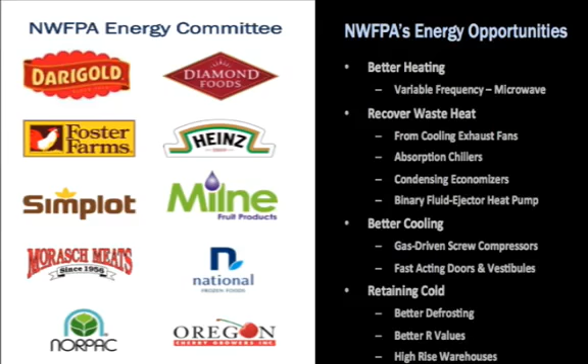So, where did today's content come from? Well, we worked with the pilot team of NWFPA members. They prioritized problems and opportunities for which externally developed innovations might be a solution for the entire membership. For each of these opportunity categories, Emerging Tech Accelerator does a worldwide scan and identifies 50 to 100 solution possibilities. These short lists are then studied and ranked by the pilot team, and then we invite the top-ranked innovators to

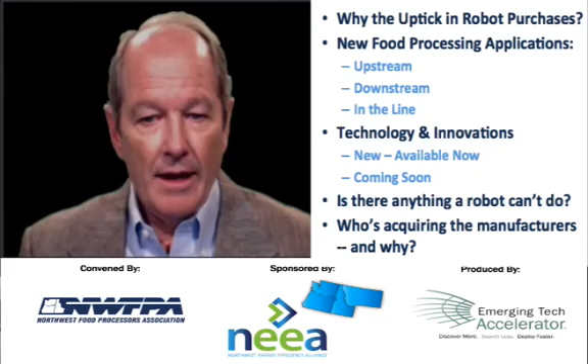present in this forum. I'm going to introduce the panel in just a moment, but first, here's a list of topics we'll be covering with the panel. If there's something you want to cover that is not on that list, don't hesitate to ask, just use the chat screen. Okay, let's introduce the panel.

Representing robot manufacturers is Jonathan Farrell of ABB Robotics. ABB is based in Basel, Switzerland, but Jonathan works out of Denver, Colorado, where he can sometimes be found doing time and motion studies on a big bike. Representing system integrators is Ken Tennell of Bastion Robotics. Bastion is in Maryland, Missouri, a suburb of St. Louis. Representing the CapEx decision, whether to buy a robot or not, is Charles Goulding of R&D Tax Savers from Syosset, New York, a few miles south of Oyster Bay on Long Island.

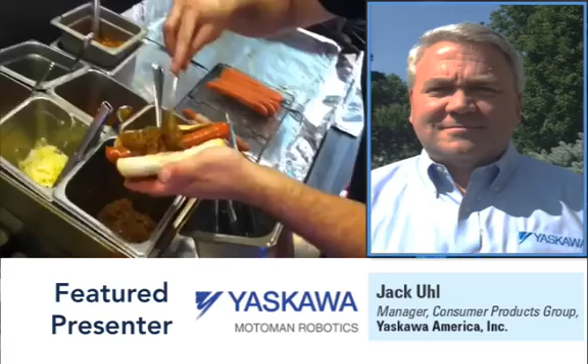And also, let me introduce our featured manufacturer, Jack Uhl of Yaskawa Motoman. Yaskawa is from Kitakyushu, Japan, but Jack is from Cincinnati, Ohio, home of the Skyliner.

All right, well, thank you very much for the time today. And actually, the panel did an excellent job highlighting and underscoring a lot of the new technology developments within the food processing and food packaging environment. I'm Jack Uhl. I'm the sales manager for Yaskawa Motoman Robotics, specifically our consumer products group. We are headquartered in Miamisburg, Ohio, just south of Dayton. And I'm very eager to share some of the technologies that we see at Yaskawa Motoman that are influencers and technology advancements within food packaging and processing.

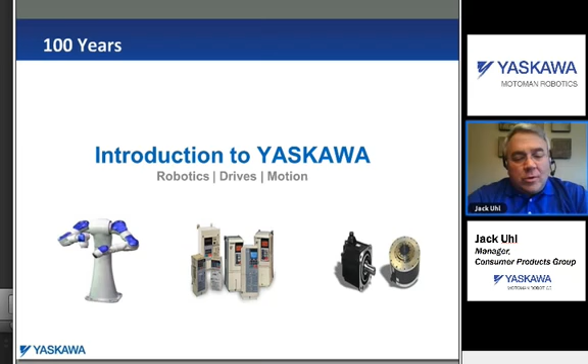First, a little bit about who we are at Yaskawa. We are a 100-year-old company. Most people know us for anything that moves. We are considered motion experts. We have 3 different groups within Yaskawa: Motoman Robotics, and then our drives and motion, which are drives, and everything motion related with servo controls.

Headquartered in Kitakyushu, Japan, we've got about 15,000 employees, but we are a very centric U.S. operation. Our headquarters is in Waukegan, Illinois, outside Chicago, which is the building on the lower left. And our Motoman headquarters, again, is in Miamisburg, where we house about 500 employees. And we control everything robotic from Canada through South America.

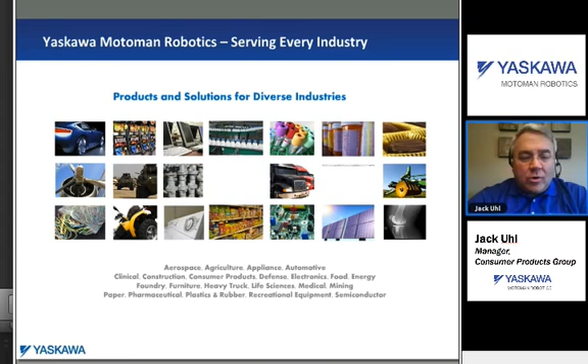Globally, we have facilities in 25 countries on 6 of the 7 continents. It provides support from engineering, applications, product development, assembly, and integration. So virtually, since most of our food and beverage organizations that we support are global entities, we provide that global support as well. But we expand certainly beyond the food and beverage industry. We have a presence in virtually all the industries from aerospace to medical, pharmaceutical, certainly heavy industry, agricultural, as well as consumer goods.

So let's start by understanding a little bit about robotics and food and packaging. This particular data illustrates a rather alarming trend within consumer packaging, and that is the growth of robotics. If we look at this and understand that we segment this into two different areas, the blue is representative of end-of-the-line automation, which is palletizing, and then the red signifies upstream automation in robotics, which is pick and pack. So it's your processing and your initial packaging.

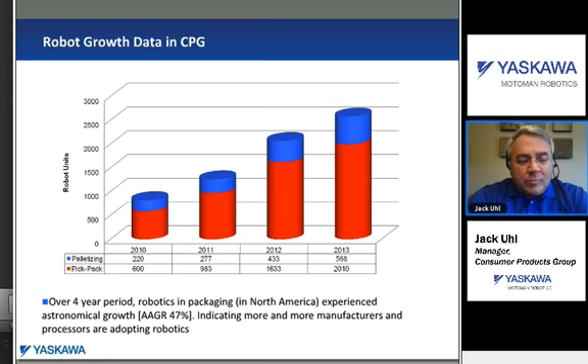But what's interesting to look at is just in a very short term, over a 4-year period, we can see a very drastic increase in the deployment of robotics within each sector. Specifically in pick and pack, robots have been deployed almost threefold in just over a 4-year period, and just shy of a threefold increase in the palletizing segment. So we take pause to understand that all of you and your peers are really taking a serious look at robotic deployment within the food processing and packaging environment. Next slide.

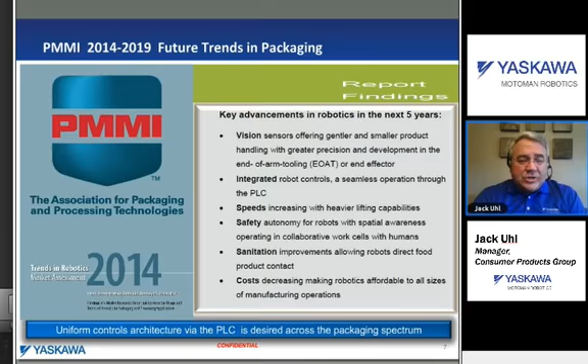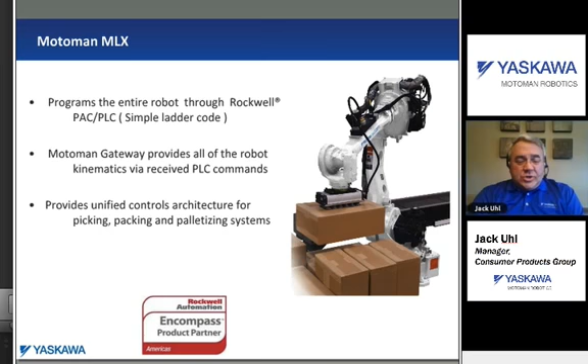We've defined the unified control architecture at Yaskawa as the MLX. And what this means is we allow the robots to be programmed and controlled through a central PLC. In this case, it could be a Rockwell PLC, but it could be a Yaskawa motion controller. It could be another brand of PLC. Ultimately, our gateway technology allows all the kinematics of the robot to be handled through our unique processor platform. But the operator interface and the programming of the cell is a very well-known ladder logic format, which is within the PLC. Next slide.

This architecture summary further describes how simple this solution is. Conventional robot deployment utilized a robot controller that would in turn then tie in and try to communicate to the PLC. What you ended up with were redundancies in 2 separate processors, the robot controller and the PLC, and 2 separate languages. The language in the PLC, which is a ladder construct, and the language from the OEM robot controller, which is its own unique language. This redundancy is what customers are echoing that really should be eliminated. The PLC should be, by nature, the heart of the line. And Yaskawa Motoman has developed this solution.

Specifically, we provide our gateway module, which is the heavy lifting of the robot kinematics, but a simple Ethernet connection to the PLC allows ControlLogix, RSLogix, to program the actual robot architecture. This is a unified solution, very simple, very cost-effective, without sacrificing anything in the controls. Next slide.

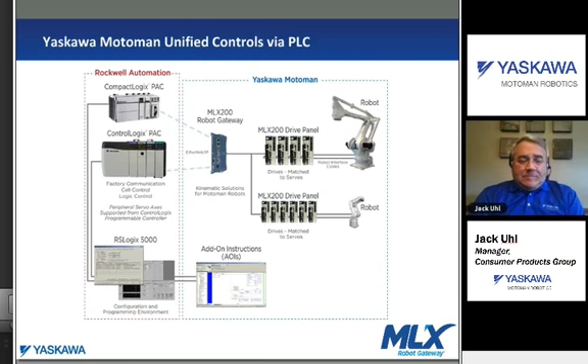So we take a big step back and we ask the question, well, why robotics in food and processing? Logical attributes: speed, accuracy, and longevity. It's a foregone conclusion that robots will last long beyond the legacy of the processing line. They are immensely accurate, many times more than what's needed, and the speed and repeatability of a robot can't be equaled by a human. So those are great attributes. But when we drill down a little bit further, we realize that there are a lot of other positive attributes for the consideration of robotics within a food or food processing packaging environment.

The first attribute, and what customers realize is one of the advantages, is flexibility. Robots permit operators to allow the actual cell design to be redeployed, reconfigured, and flexible for setup and operation for programming, which means a very quick changeover, a very simple operation.

The asset value of a robot is defined as a redeployable asset versus a fixed asset, which is a custom designed palletizer, case packer, picking scenario. A robot can be redeployed by simple programming and retooling to perform multiple tasks within an organization. Therefore, companies are realizing that they maintain an inventory generally of used robots and can redeploy them on short notice for other tasks and other purposes. The ease of use of robots, the unified controls, definitely provides an advantage for initial robot deployers and operators.

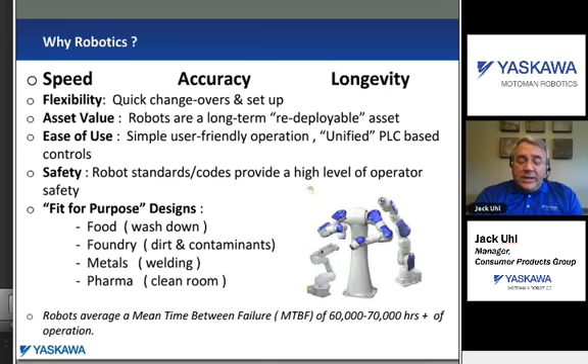So when we take a step further from the actual robot itself, and we've learned a little bit about the attributes and benefits of a robot, now we want to drill down into understanding the complementary technologies that have also evolved and are utilized within robot applications. The first being vision. 10 plus years ago, vision was deployed, but those who had worked with vision realized it was a challenging task because vision requires lighting, it requires contrast, etc.

The evolution and advancement of technology in vision have permitted cameras to be more intuitive and extremely powerful. But the tasks associated with vision have also required that they recognize parts and orientation, size the parts, understand if there's a defect, etc. The video will show us a little bit more how vision is deployed in a practical application.

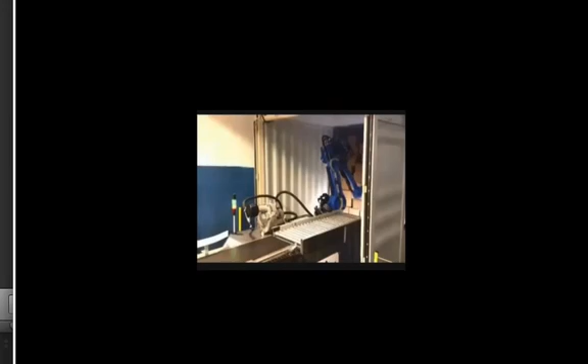What we're showing here is one of our Motoman partners who has developed technology utilizing robotics for truck loading and unloading. You can look inside the trailer and see a myriad of different size cases, and the robot is executing an initial mapping task with vision and lighting to see where all the grid coordinates are for those cases. Those grid coordinates are then very quickly and efficiently mapped to the robot control for trajectory execution.

So the robot simply follows its map of coordinates of all of the case locations and ultimately seeks those particular cases in a very precise orientation and discharges them on a takeaway conveyor. So this is what's defined as spatial vision. And this is one of the areas where vision has really evolved from 2D into 3D. Thank you.

As far as tooling, obviously robots have a kinematic profile like a human being. So again, we're migrating from the skeleton of a human and, in simple relative terms, deploying technologies to emulate what a human does. So the next step would logically be the tooling, which is in essence our grasping hands or fingers. Tooling has been very, very generic for many years. Vacuum cups, clamp paddles, forks for bags, maybe a stripper plate for cans.

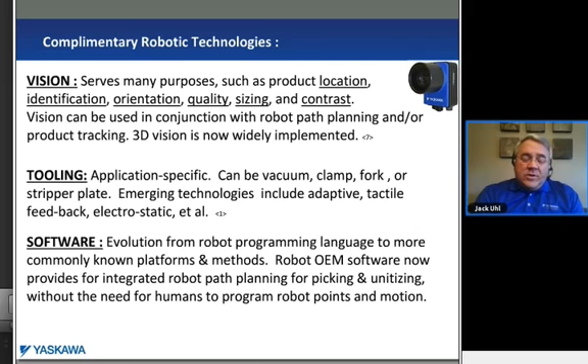And certainly that's probably the 80-20 rule. 80% are generic tools and they work fine and they're very functional. But there are a lot of different technologies now in end-of-arm tooling that allow robots to be deployed because of the tooling capability, whereas before tooling inhibited robot deployment. So the next video will show just a smattering of some pretty neat technologies as far as the evolution of tooling.

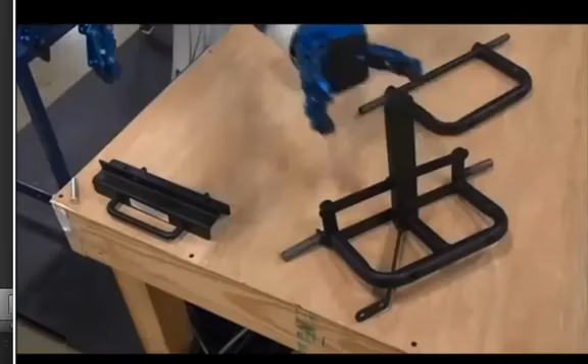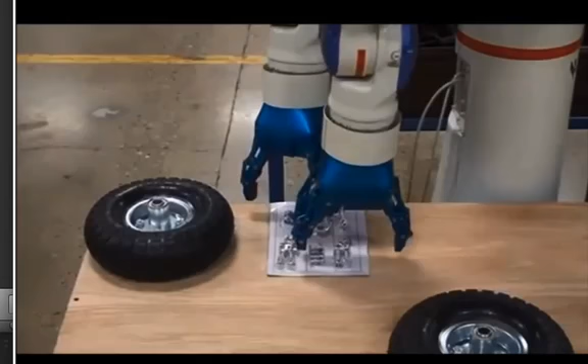This is a tool by one of our partners called Robotiq. This is a 3-fingered tool, and one of the advantages of this is certainly the dexterity. Each finger has multiple joints. It can work on multiple axes from either a side clamp or a collapsing multi-joint grasp, I should say.

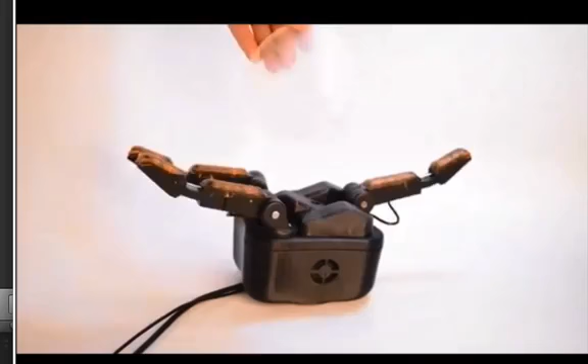This has evolved into a similar type of technology. This is by Rethink Robotics, or Right Hand Robotics. This is actually a tactile feedback tool. If we look very closely, the actual fingers have a tactile feedback. The purpose for this would be to be able to grasp very light, very flexible, very unique profile parts. The tactile feedback allows the force spectrum to then be interpolated and commanded to apply the correct grasping force without ultimately crushing the product.

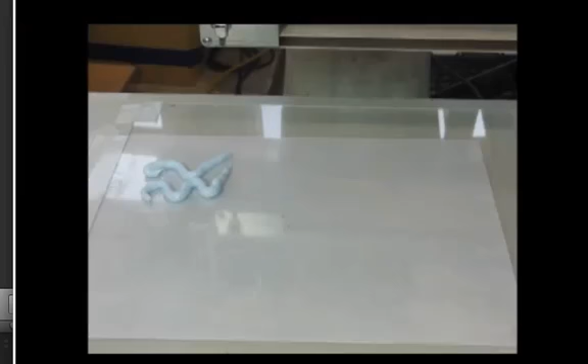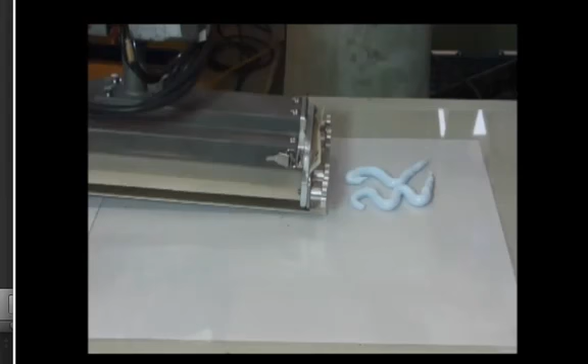This particular video is a micro belt swivel tool. This allows for showing an actual liquid or a foam, if you will, being able to be picked off of a bed and relocated without disrupting the profile. This again is just an example of an out-of-the-box type of tooling solution, but yet it does illustrate that with technology and with the emergence of product profiling, etc., we can develop tools for very unique product profiles and tasks.

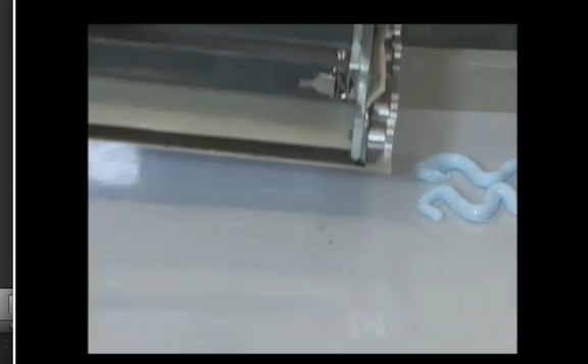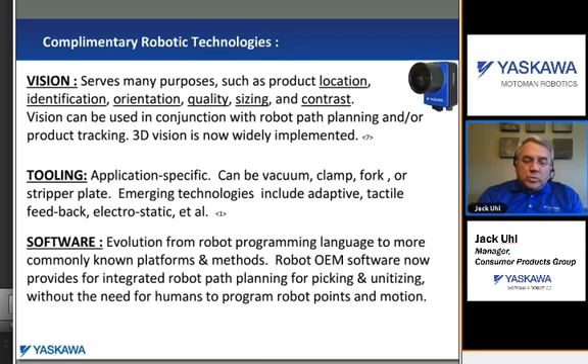Software is ultimately the brain of the robot. The operating software from a robotic platform can be intrinsic to the actual product profile and path execution of the robot, but robot OEM manufacturers such as Yaskawa Motoman have evolved the software to provide for task-oriented software solutions. An example would be for palletizing, which we'll show on the next slide, where it allows for the actual robot execution to be pre-pathed and executed by the software rather than allowing the operators to command the pick points and the trajectory points. Motoman has developed what we call Pallet Solver.

It is extremely powerful offline PC generated palletizing software which allows for the importation of palletizing patterns from third sources. We can assign cell obstruction zones, the robot tooling size, the actual zoning of the pneumatic tool is all pre-programmed. The simple operation allows for case sizes, length, width, and height, to be put into a GUI through the PC, so it's a very visual platform. The data will then be optimized and layer patterns can be created.

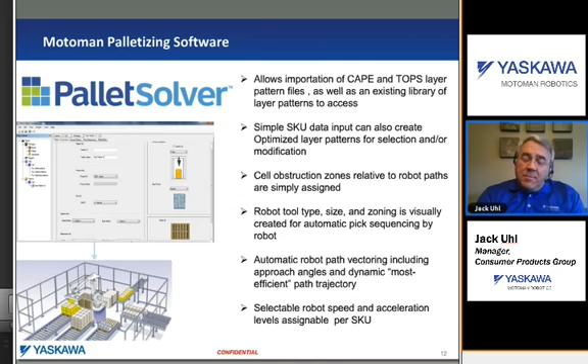And the final result is, from that point, the pick execution of the robot to the picked cases, the path trajectory, the velocity and speeds, and the entire pallet build is all automated via the software. There is virtually zero programming of points that's required by the integrator or the end customer. So this is an example of a task-specific software solution that eliminates the heavy burden of actual robot programming, and it's simply inputting data into a PC, and the entire robot kinematics are pre-programmed and executed. Next.

So we've talked a little bit about the actual software in the brains of the robot, the tooling for the robot. The next logical execution of technology is mobility. Robots 95+% of the time are static deployed, which means they're mounted on a pedestal or inverted. But the technology now is lending itself to the deployment of robots to serve multiple machine cells or multiple pick points via conventional portability methods. And there's many operations now that are utilizing AGV type of vehicles to move robots into certain work zones. The video coming up will show an example of this.

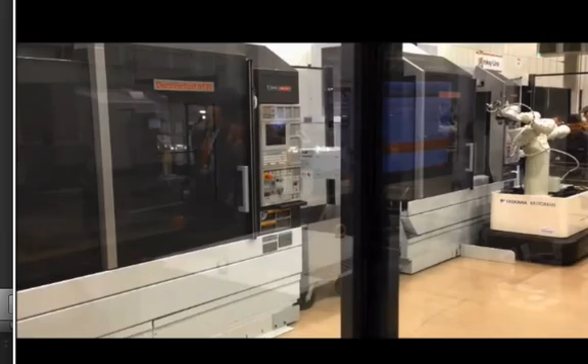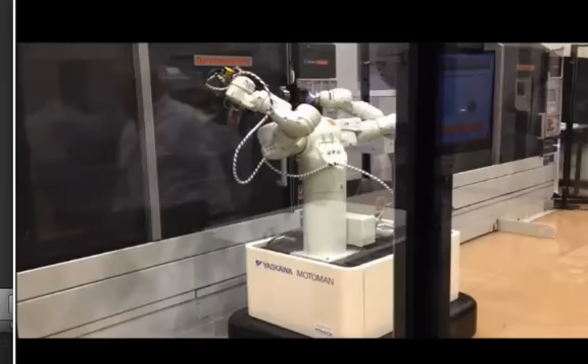This is not food per se, but this is something that recently has been developed by Yaskawa Motoman. If you look closely, you'll see one of our dual arm robots tending to multiple machine cells, but you'll see the capability of the robot then to be relocated from point to point, self-docking, and then performing its multiple tasks, taking advantage of the ability to use one robot for a very wide physical space of operation.

Safety is a necessity, and we are not only governed by RIA as far as safety standards, but safety is probably preeminent within Yaskawa Motoman. The fortunate advantage for the dedication to safety is that through RIA and ANSI, there have been an evolution of safety tools that permit robots to work in a collaborative fashion with operators, programmers, etc.

There's a couple different definitions of collaboration. One is speed and separation. The other is force limiting robots. But ultimately, this allows for the safety fences to be in a very compact method. It allows for operators to actually enter the work cell, and the robot will then enter into a safe working speed with a separation of distance between the operator and the robot.

The force limiting robots that are much smaller capacity and a little bit slower operating allow for tactile feedback through the force limiting features that they possess. So if an operator reaches in and the robot arm is on a path and touches the operator, it will stop in a safe mode or a safe speed.

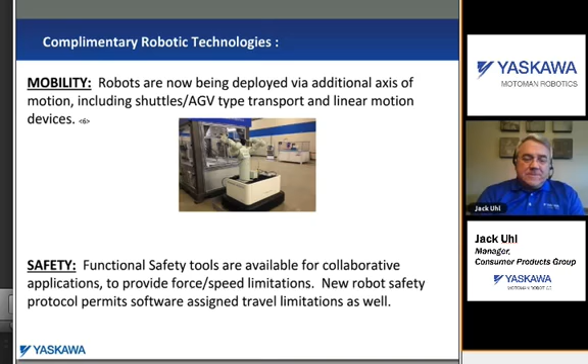So when we start now drilling down to the ultimate purpose of our dialogue today, we want to take a look at where robots are deployed from processing through primary packaging, ultimately into secondary packaging. Next slide.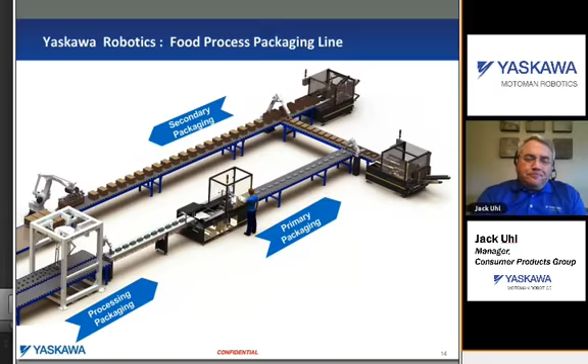At the front end of the line of processing, when the raw materials are introduced into an environment, we begin to see that there is a demand for some type of automation, obviously because of the labor aspect. But one of also the current drivers for looking at automation and processing is the Food Safety Modernization Act, or what's referred to as FSMA. This has been released in 2014. Next year and the following year is the scheduled final implementation. And it's really changing the landscape for food and food processors, which most of you, I'm sure, are very much aware of.

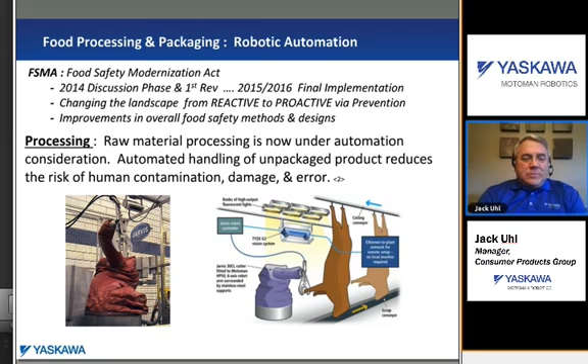A typical example of a solution for robotic automation in processing, one of our partners deployed Motoman arms with stainless steel hydraulic shears for the actual processing of livestock. There would be an inspection process. We would track the actual carcass, and limbs or primary cuts would be utilized via vision and a technology of path following through the robot to actually process and do the initial handling of the actual food product in preparation for the next steps. But I'm not going to show you that video today. It might be a little bit hard to watch, but we've got a couple other good videos coming up that will show some examples of robots in food processing environments.

In the primary side of packaging, automation is certainly, as the slides indicated earlier, on a track for escalated growth. Primary packaging is defined as picking the raw material, putting into the primary, could be a sleeve or a carton or a case. But what's required in primary packaging is generally speed, orientation of the product, because they're coming out somewhat random through your initial food processing, could be ovens or chillers or IQF, and also some inspections of quality and orientation. The video coming up will show some great examples of primary packaging.

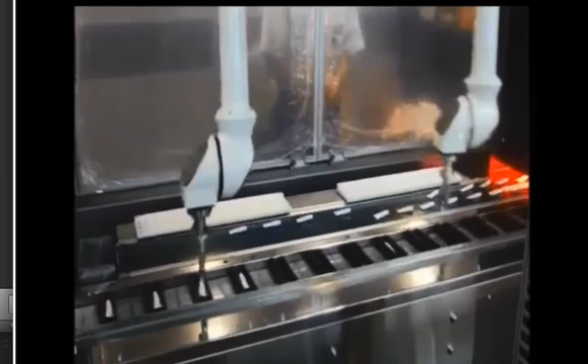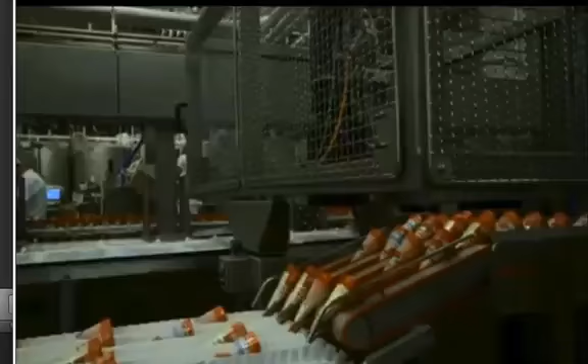What robots generally do an excellent job at is understanding motion control, path following, and orientation. This is a good example showing primary picking of products from an in-feed belt, relatively random, but reorienting them and putting them into pockets for flow wrapping or over wrapping. This is a tried and true method of solutions. You can imagine how many hands would be required to do that function.

This is a really neat application. This is frozen ice cream cones that are packaged and ready to be put into cartons. The profile of the cone is challenging. It's a tapered cone, it's round, but yet it's not consistent from head to tail. High-speed Yaskawa Motoman Delta robots are performing the picking and task executing.

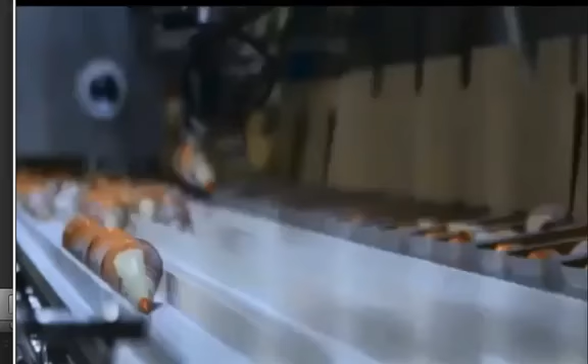We do zone to zone to zone balancing through the 4 robots. So you'll begin to see how we transition product from zone 1 to 2 to 3 to 4. But the picking sequence requires the products to be alternated and nested within the actual cartons. So you begin to see how fast that can be performed and how accurate and consistent robots can perform primary packaging by placing alternating goods into the cartons, ultimately down for secondary and final completion for packaging.

Secondary packaging is what we all know has been very commonly deployed in robotics. Palletizing, maybe case packing, probably for 20 to 30 years we've automated that function. But there has been a change, and the change was driven by the sustainability efforts within the supply chain. More and more manufacturers are driven by the need to reduce the actual packaging content, to have dynamics associated to the types of products that you fill or package your products in.

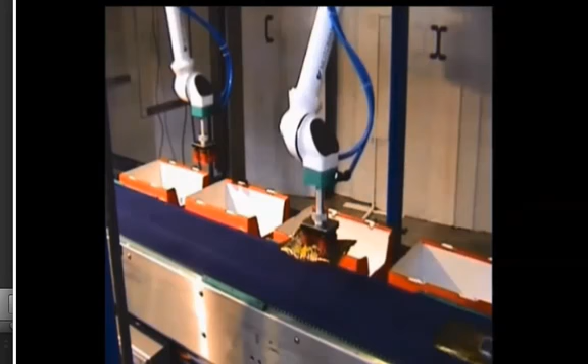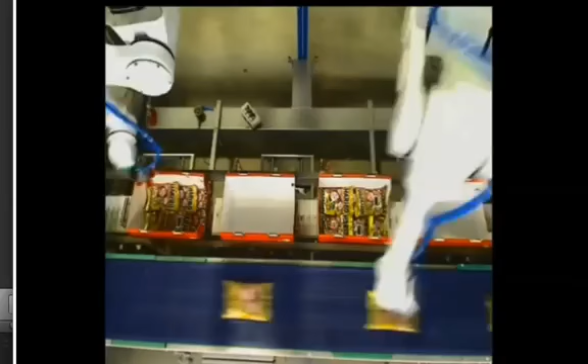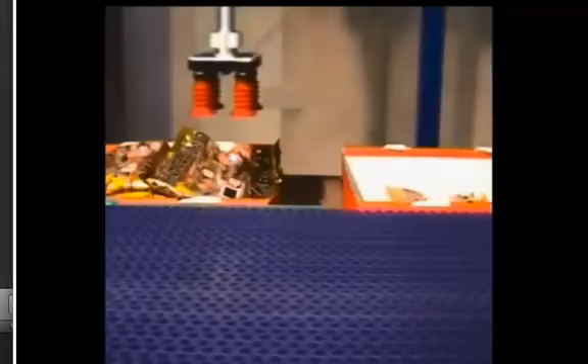The bottles, the containers, the shapes are infinitely changing. All those supply some challenges for packaging and for automation. The videos coming up will show a couple good examples. In secondary packaging, now we've got the product in a bag. We can pick, track, nest, cavitate into what's called a display case. Packagers don't really like this type of case, but obviously sustainability is driving that. It's a point of purchase display. Sides are open, tops are open, but again, we have to pick that on the fly.

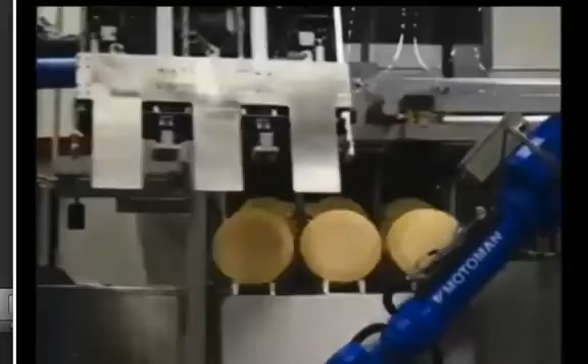As far as an example within a plant for secondary packaging, this is cheese. And you begin to see that robots can do some very unique tasks. Here we're picking up large wheels, placing them onto an actual shelf for another process. But you'll see shortly how robots can collaborate with each other based on a need for reorientation. So we can have one robot hand off to a second robot in a collaborative workspace with high accuracy and perform a secondary task.

This particular example is showing bags of potatoes. Again, very shortly after they've been processed, cleaned, and packaged on the primary side, but then ultimately being unitized and accurately placed into a Gaylord container for final shipment to customers. Take a look at the tool. That's not a common tool that you'll see everywhere, but again, it's fit for purpose design for that application.

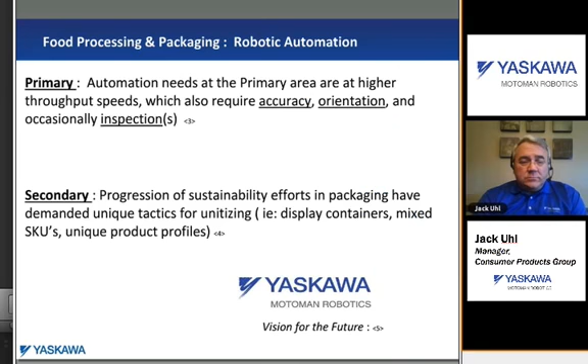And that's the summary of today's event.